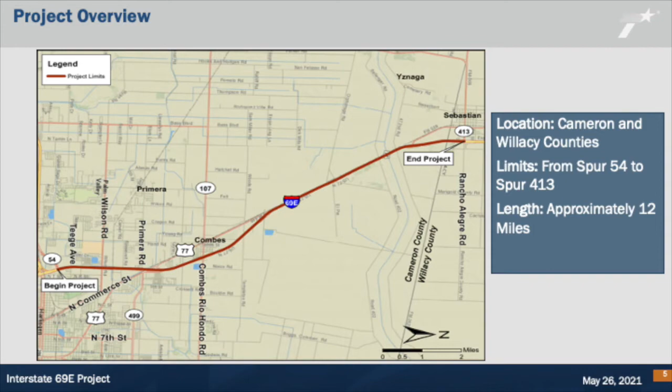Currently, the I-69E project area extends from Spur 54 to Spur 413. The average right-of-way within the project area is 300 feet. The current roadway consists of a divided 4-lane highway with 4-foot inside shoulders and two 12-foot lanes and a 10-foot outside shoulder in both directions. There is also a 34-foot depressed grass median with a cable barrier.

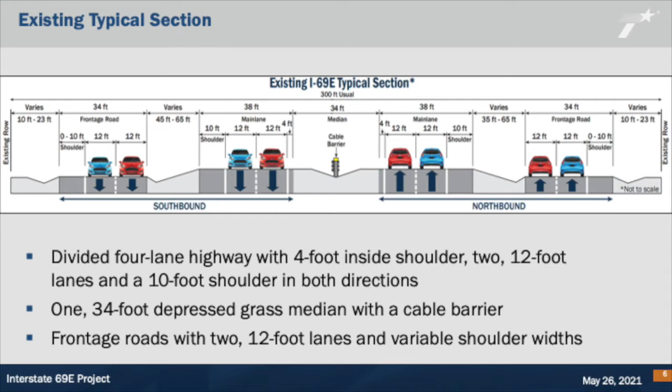There are currently frontage roads with two 12-foot lanes running north and southbound with approximately 10-foot outside shoulders in either direction. The main lanes and the frontage roads vary in their separating width from 45 feet to 65 feet going southbound and 35 to 65 feet going northbound. The distance from the right-of-way line to the edge of the frontage road varies from 10 to 23 feet.

Now let's talk about daily traffic volumes and level of service, or LOS, along I-69E: what is projected in the year the project opens in 2025 and what is projected for the future. LOS ranges from A, which is free-flowing traffic as shown in light green to the left, to LOS F, which is heavily congested as shown in orange on the right of the screen. In terms of delays experienced by the traveling public, a level of service A through D is considered acceptable, and a level of service E or F is considered unacceptable.

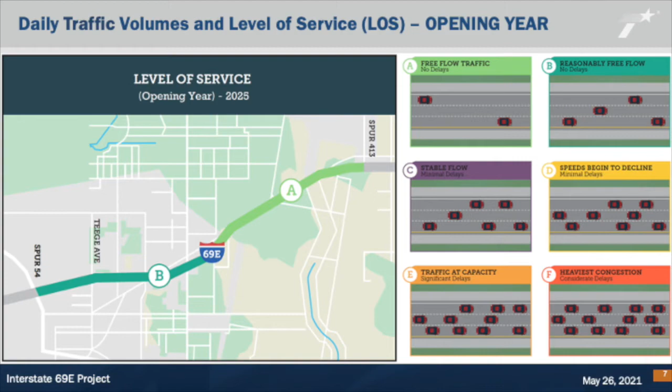For the opening year, the basic freeway segment, ramp junction, and weaving segment runs indicate that operations perform at an LOS of A or B for most of the study corridor. For the 2045 proposed no-build scenario, the basic freeway segment would perform at an LOS of B for most of the study corridor. However, for the ramp junctions, the operations would perform at an LOS of B or C for most of the corridor.

Alternatively, the southern portion of the project would experience an LOS of E or F. For the 2045 proposed build, the basic freeway segments perform at a level of service of A or B for most of the study corridor. For the ramp junctions, the operations perform at an LOS of B for most of the corridor. Alternatively, the southern portion would experience an LOS of C or D.

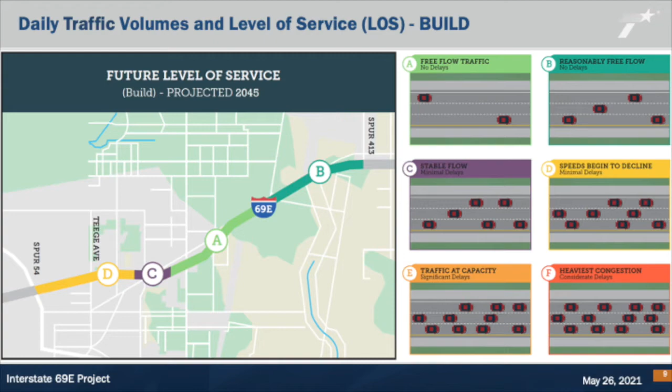One of the goals for this project is to reduce crashes along the corridor. The project team analyzed crash data for the project corridor from 2015 to 2020. Locations of crashes were placed on a map, and circles were placed and color-coded where multiple crashes occurred in the same general location. These are called hotspots.

The red spots show the highest concentration of crashes, which center around more of the start of the project area, the access ramps, and the end of the project area on I-69E. The yellow and green colors along I-69E show a lower concentration. Between 2015 and 2020, even though the number of crashes decreased by 44% with 548 total crashes, the multiple hotspots show a need for an improved roadway.

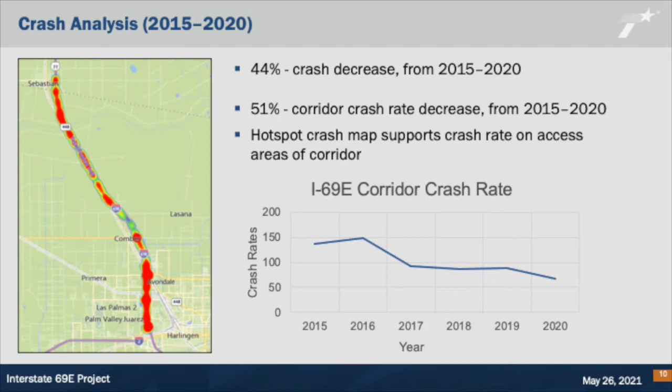The project is needed to improve mobility and improve safety. The purpose of the project is to reconstruct the I-69E main lanes to interstate standards, increase the design speed, and reconfigure ramps for operational improvements. The proposed typical section would redesign the I-69E roadway configuration to interstate standards, consisting of a divided 6-lane highway with 10-foot outside shoulders, as well as a continuous concrete traffic barrier in the median to separate opposing traffic.

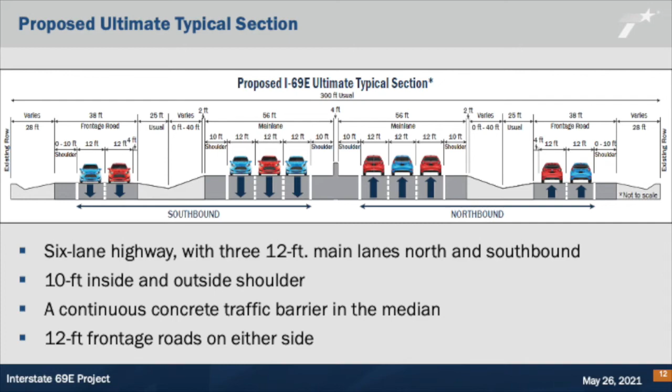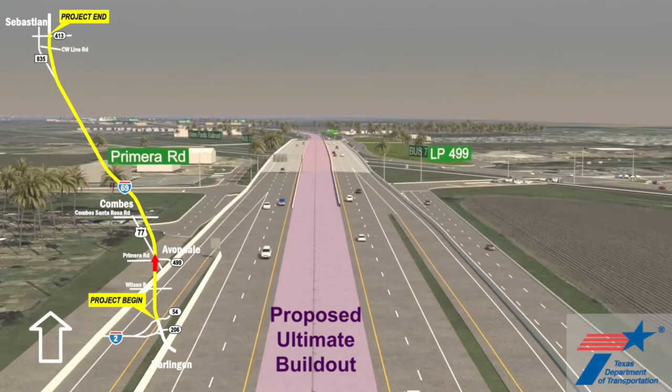For the proposed typical section, the project animation team created a 5-minute video out of the schematic and project area design. Here is a short snip of that video showing a 1-mile section of I-69E from SH-107 to Sid Jones Road.

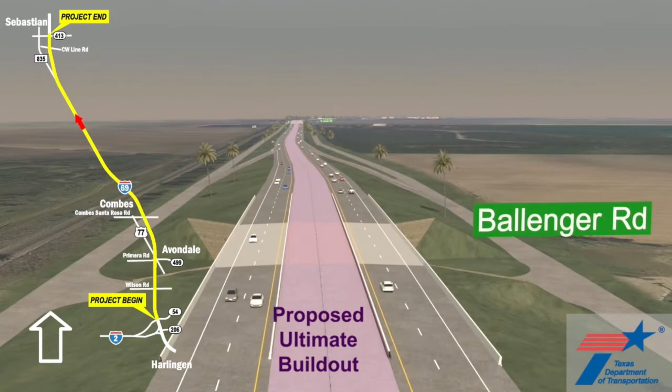This map shows an overview snapshot of the intersections along I-69 East, where additional traffic signals will be added. The signals will be built at the northbound and southbound frontage road intersections at Loop 499. Loop 499 will be realigned to improve traffic flows across the Business 77 and Union Pacific Railroad crossings. A one-way northbound frontage road also will be constructed closer to the main lanes.

The existing two-way frontage road will be converted into a 3-lane access roadway with a through lane in each direction and a turning lane in the middle. The southbound frontage road will be realigned to tie directly into Starbuck Road. Turnarounds will be provided on both the south and north sides of the Loop 499 Business 77 intersection with I-69E.

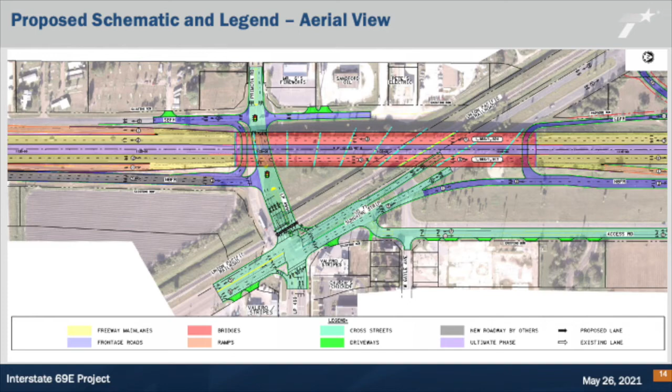The engineering team has developed schematics to show proposed improvements that meet the project needs while minimizing the additional right-of-way needed and impacts to private property. This is a high-level overview of schematics, and we have included a large PDF on the project website. The engineering team has broken the project layout into several pages for Phase 1 and Phase 2 to show more detail about the interstate improvements.

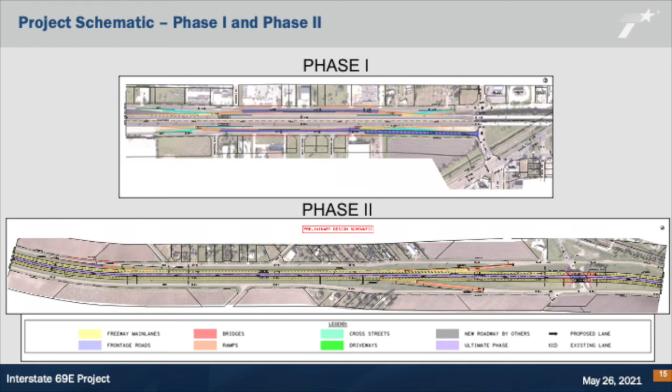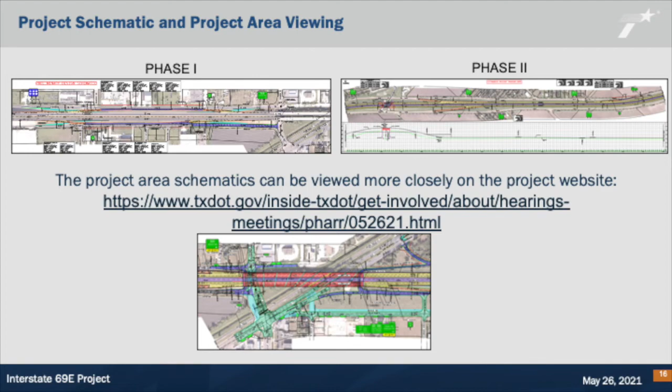The proposed project improvements for Interstate 69E would bring the existing roadway to highway conditions by reconstructing the existing roadway to a 6-lane road with a concrete barrier, redesigning and reconfiguring several access ramps, constructing new frontage roads, redesigning the intersection at Loop 499 with Business 77 and Starbuck Road with Business 77, and increasing the speed limit from 55 miles per hour to 75 miles per hour. In addition to these improvements, the project team would translocate any trees moved from the project area based on the tree mitigation plan.

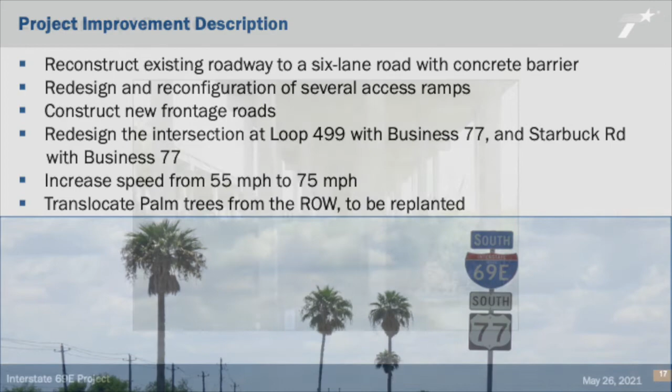Now, let's discuss the environmental studies completed for the I-69E project. The project team identified and evaluated potential environmental impacts that could occur as a result of constructing the improvements. Technical reports for each of these studies are available for public review. As part of the project's NEPA compliance, TxDOT considered biological resources, community impacts, water resources, hazardous materials, archaeological and historical resources, and park and recreational areas.

The project was designed to avoid or minimize impacts to the greatest amount practicable. Overall, impacts to environmental resources as a result of the proposed project would be minimal. Much of the environmental findings include more detailed information on right-of-way, displacements, and floodplain within the project area. For instance, the project will require a little more than 1 acre of new right-of-way, but no residential nor commercial displacements are anticipated. Additionally, there are no anticipated adverse community impacts, nor impacts to threatened and endangered species.

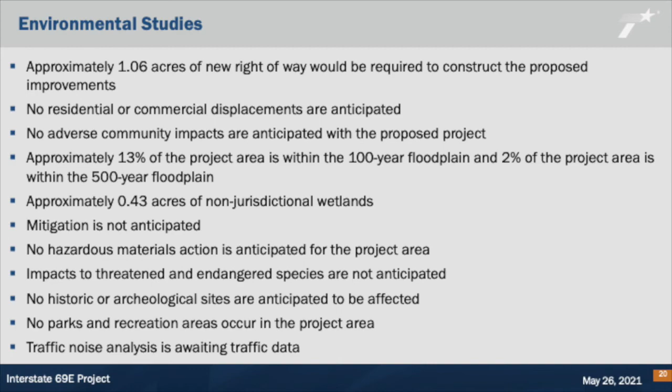The team also found that only 2% of the area is within the 500-year floodplain and mitigation is not anticipated. The proposed project would require an additional right-of-way at Starbuck Road of approximately 1.06 acres. This project would not displace any above-ground structures, but would include the displacement and relocation of underground utilities. Significant traffic delays are not anticipated, and adjacent property access is expected to remain open.

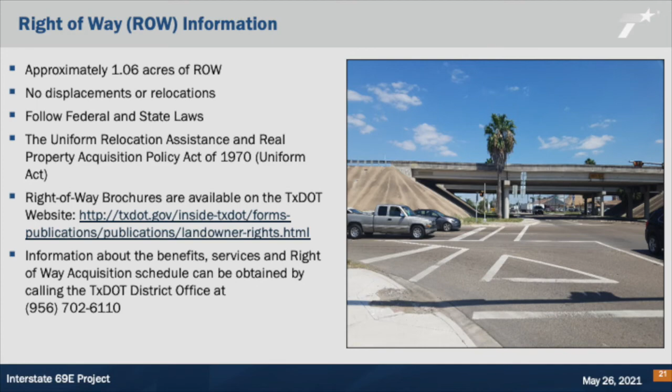Now, let's go through the project schedule, next steps, and cost. The Interstate 69 East project began in the winter of 2016. This included site visits and surveying and then moved into development of the alternative analysis through 2017. During this time, the project team held meetings with local agencies regarding these proposed designs. The next stage in the process is environmental documentation, which began in 2018 and continued through 2021.

Currently, we are in the public meeting stage where the project team gathers input from the public on the proposed design. The steps going forward involve schematic design, which has been ongoing from 2018 to 2021, and environmental and categorical exclusion determination in 2021. As we said earlier in the presentation, Phase 1 construction is estimated to begin in 2022, and Phase 2 will be constructed later in the process. The total cost of construction for this project is approximately $278.1 million.

TxDOT is committed to continuing our efforts to gain public feedback about this project. We understand that this virtual public meeting format is a bit different, so let's take a few minutes and explain the comment process. Given our COVID-19 situation, the Pharr District is asking the public to provide input through verbal and written comments. You may submit comments by going to the project webpage at www.txdot.gov and using the keyword search I-69E Interstate Improvements, where you can download the comment form. You may email the comment form to the project manager at jose.j.lopez@txdot.gov or email him your comments directly.